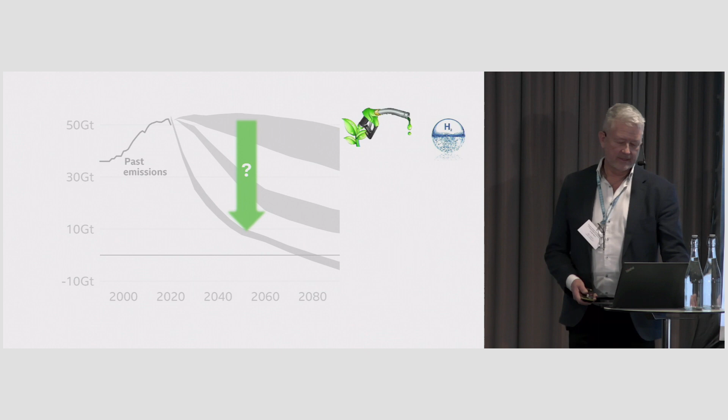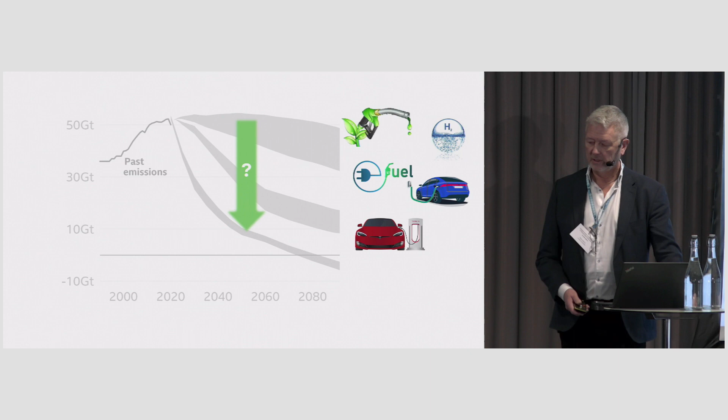So we know it is urgent, but do we really know how to accomplish this fantastic drop in CO2 emissions? We have and we debate several alternatives. We have biofuel. We have electrofuels. Hydrogen. We have various forms of electrification: plug-in charging at home, fast charging along the road. We even have electric road technology today.

And we know that all these technologies work. We can do what we want to do with a single vehicle with any of these. Even the newcomer on the block, electric roads, has turned out mature enough to be put on public roads. But we still don't know exactly how to upscale this. Upscaling is the challenge of the moment. We need to reach 100% electromobility by around the middle of this century, and there are many questions to answer.

Do we have enough biofuels? Can we produce and distribute enough green hydrogen? Professor Sebon has already said no. Can we produce enough batteries? How many fast charging stations do we need? How much electric road systems would we possibly need? The energy transition that we need to implement takes decades, and we only have one chance, in my opinion. It is very important that we move in the right direction now.

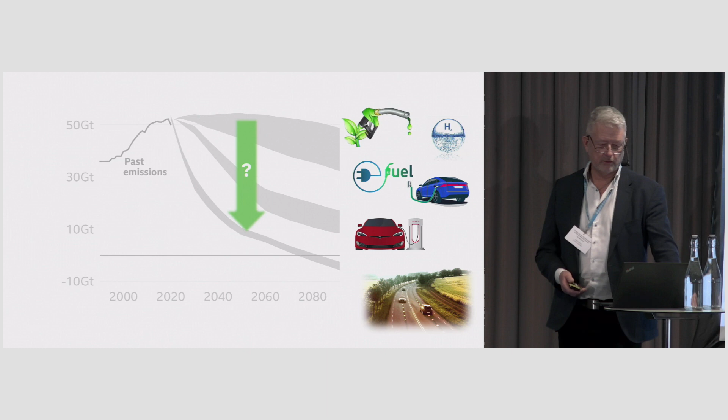A country that is way ahead of us is Norway. They have already reached almost a quarter of a full electric vehicle fleet and sell over 80% full electric vehicles today. Their experience of upscaling gives us a hint of what we are up against. That's why Lars is here, as a voice of the Norwegian EV upscaling experience.

I like to throw numbers at people, and I will take one example that I extrapolate from Norway that I think is really interesting. For the last 5-6 years, since about 2018, Norway has had a density of fast charging stations of about 1 fast charger per 100 full electric vehicles. This is an empirically found level that provides a reasonable waiting time at fast charging stations at times of high traffic. I don't think Norway has decided to build way more fast chargers than needed; that level is in balance with practical life with electric vehicles.

If we keep that density, assume the rest of Europe is like Norway, and apply that principle to the TEN-T comprehensive network, which is 130,000 kilometers across Europe, with a fast charging station every 60 kilometers as AFIR recommends, then the Norwegian density level corresponds to, hold on now, 1,100 fast chargers every 60 kilometers. You heard me right. That's about 10 football fields every 60 kilometers.

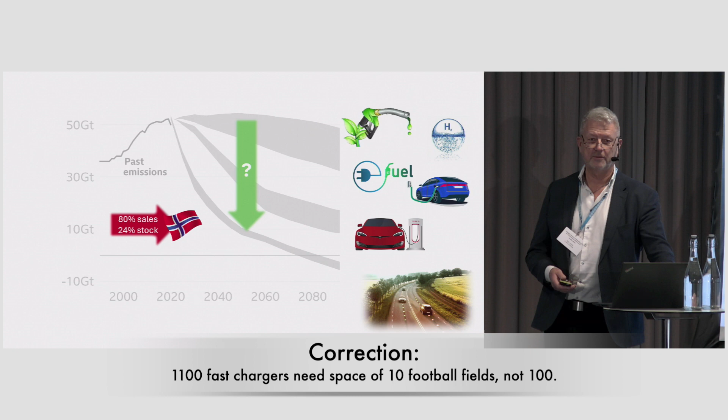Can we do it? I don't say that everybody is like Norwegians, but I think we in the rest of Europe are not too different from Norwegians. We have to take this seriously. It is not obvious that upscaling electromobility this way is easy.

It looks so now, but I have doubts, and that's why I think it's so interesting to listen to you, Lars, and to hear the Norwegian experience. And here we have the motivation for this conference: to answer the question of realism with upscaling of the different technologies, not only electrification with batteries and roads and fast chargers, but all the other alternatives as well.

What are the main obstacles on the way to a significant reduction of CO2 emissions from road transport? Which technology or combination of technologies gives the highest likelihood of success in abating CO2 emission from road transport in a 10 to 25 year perspective, which is what we are talking about? To answer those questions is one of the reasons for having this conference. Another reason is to present the results that have come from evaluating one of these technologies, the on-road technology that we will look at more today.

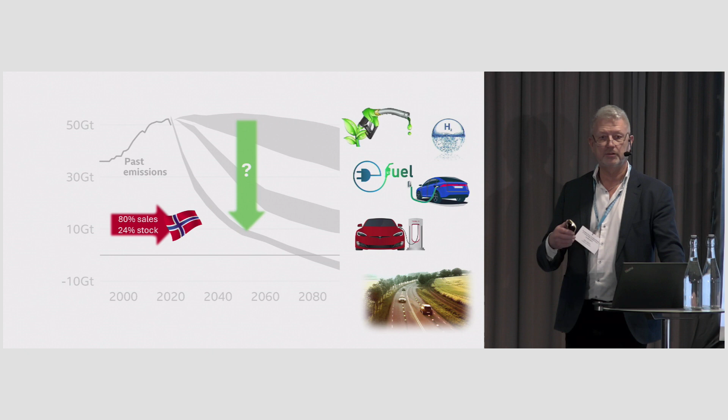To answer these scientific questions, this challenge, the project Evolution Road has engaged external expertise, external to the project, to approach the challenge. And now I should show that slide. To approach the challenge in a broad and objective way. When we talked about having this conference, we said that it should be a result conference. We should present what we have accomplished, how good the electric road works. And we said no, that will only be a conference where we tell how good we are, but not how we fit in. So we need someone to objectively look at how this technology, which works, fits into the bigger picture.

But we want these two days, today and tomorrow, to be used to challenge the conclusions that we have reached so far. We want discussions, opinions, we want feedback. We will work that into the final version of the report to make it better before publishing it to a much wider audience. And that with your help. So with these words, I hand over to Jakob from RISE to present a summary of the work so far. Thank you.

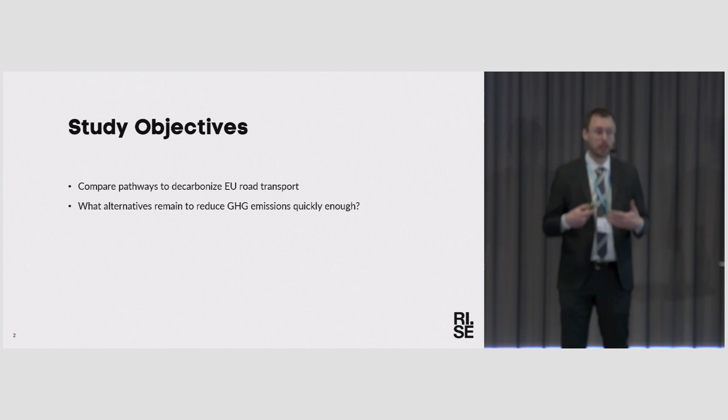Indeed, so this is at least an attempt to do an independent review of different pathways to decarbonize EU road transport, as much as possible by 2035. RISE is not tied to this Evolution Road project, although it's a very interesting project. Evolution Road has provided a lot of information to this analysis, but so have a lot of other stakeholders, including, for instance, the hydrogen section of Daimler Trucks. So the goals have been to compare different pathways to decarbonize transport in comparable metrics, and to really look at what alternatives we still have to decarbonize EU road transport in a quick way.

To set a little background, what are we trying to achieve? Well, the scientific advice for the EU is to reduce greenhouse gas emissions from all of the EU economy by 77 to 87% by 2035 versus the 1990 reference level. It's quite significant. For road traffic, we are today about 20% above 1990. We're not doing very well with the 35 years we've had to improve things so far. We have another 10 years to drop. It's going to be tougher now than it was.

And the current ambition level that the EU has set through policy is to eliminate tailpipe emissions from light vehicles by 2035 in the new sales. There are no targets for the rolling stock. And for the same year, reduce the emissions from new trucks by 65%.

Again, no targets for the rolling stock, and this is versus the 2019 level, not the lower 1990 level. The technologies we've looked at are the ones that both Mats and David described. It's combustion engine vehicles operated with fuels, fossil fuels, biofuels or electrofuels. It's battery electric vehicles, both new vehicles and those converted from combustion engine vehicles, where you replace the powertrain with an electric one. And you power those either with what we call slow charging, this is more well defined in the report, fast charging or electric road systems.

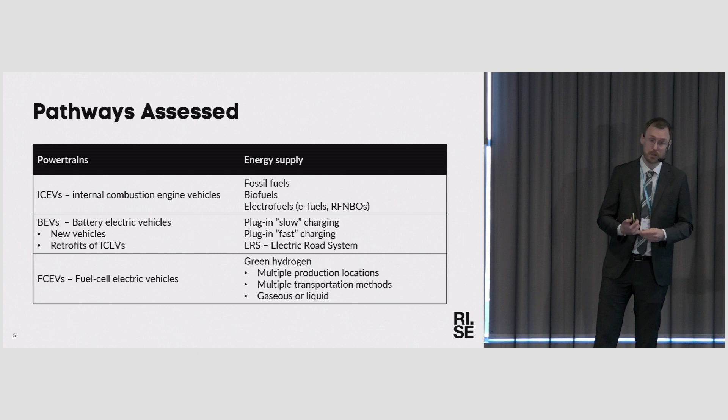We have fuel cell vehicles powered with only green hydrogen, which means that it's basically sustainable, unlike the hydrogen that we produce today, that is all from fossil fuels. And this is produced in multiple different locations. We've looked at different prices that result from this, as well as different ways of transporting and delivering it to the truck, either in gaseous or liquid form. And they have different properties associated with these.

And we try to summarize this in a levelized cost per kilometer, levelized emissions per kilometer, and estimate the kind of maximum scalability. How much of the EU road transport by kilometers could run on this fuel technology by 2035, if all goes well and if things don't go so well.

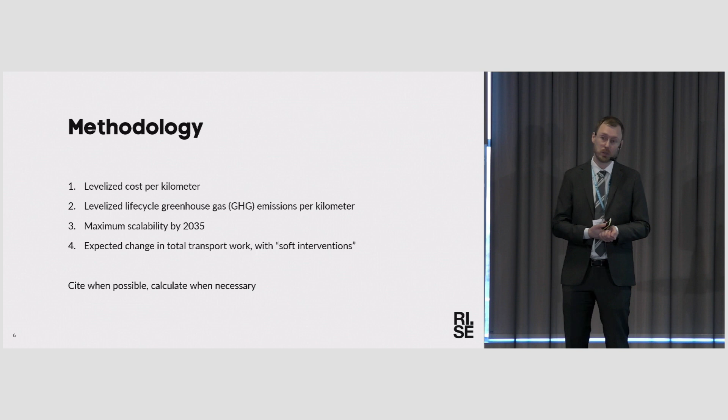And we also, this is not the focus of the study, but we have looked at complementary strategies to reduce transport demand, which is really complementary. It's not something that you can do instead of. Even if you reduce transport demand by half, you still need to decarbonize road transport as quickly as you do otherwise. No matter how quickly we decarbonize road transport, we likely still need to work with demand reduction. So they are complementary. We try to cite sources whenever we find them, but we do need to do a lot of unit conversions, and for some things there aren't really good sources, so then we have to do some calculations.

For road transport demand reduction, the short version is that we don't really see mature, scalable template solutions that you can just roll out. There are lots of examples of initiatives that have reduced demand in some little focus area, a neighborhood or so on, but to say that you can achieve this on an EU level by 2035, I strongly doubt it.

When we talk about moving cargo to rail and waterways, well, the vast majority of both cargo and people transport goes on roads today. So doubling the capacity of rail and waterways is not going to have a significant impact on the road transport. So unfortunately, that is also not going to result in a significant emissions reduction in this time frame. And in fact, from what we understand, the most likely impact this will have is that it will reduce the increase rather than actually reduce the amount of transport.

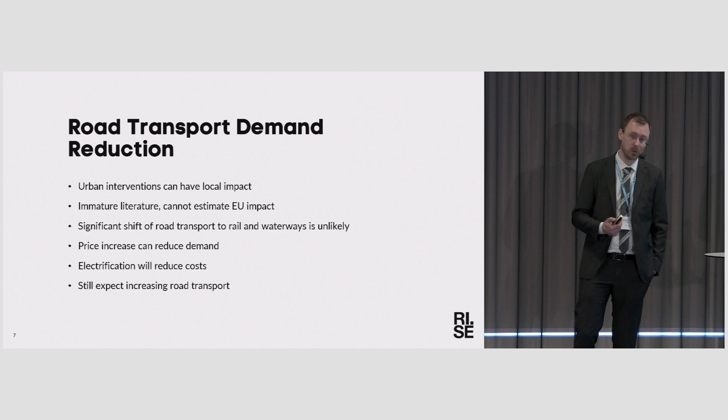Biofuels, they are the first technology that we look at. They are in use today. They contribute about 6% of EU road transport by final energy. If we assume a reasonable cost of carbon and account for that as part of the system cost of using biofuels and fossil fuels, then they have roughly the same cost as fossil fuels by 2035.

But it's very difficult to increase supply of biofuels because very quickly you start competing with food production. This means that you need new technology, you need new carbon sources, things like wood residues, and many of these come with increases in cost, and that is not very likely. If you need to triple the cost of the product, you're less likely to sell it, right? So we don't think biofuels can be scaled up much further. A little further maybe, but not much further.

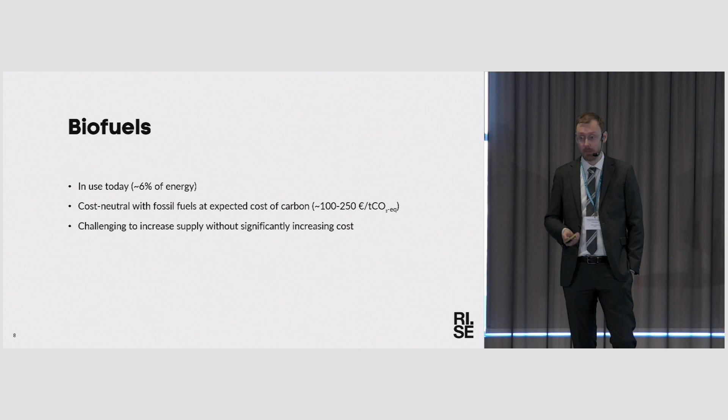Hydrogen and e-fuels. The short version is exactly what David said. It's way too expensive. The green hydrogen is not available today. You can barely buy it. Supply is much less than the proposed uses by 2035. And by that I mean the different sectors in which we want to use green hydrogen,

the sum of the demand from those sectors. If we rank these, this is based on Michael Liebreich's hydrogen ladder, if we estimate the demand from the sectors that have higher merit than road transport, things like fertilizer production, steel production, where there are fewer alternatives, then we don't have any hydrogen for road transport because demand is still greater than supply. Whether there's a demand, that depends on the cost, of course, but at least we should use it where it actually results in great decarbonization.

This also means that if we use green hydrogen in road transport, we are not having any carbon reduction from a system level. We're just forcing somebody else to use fossil fuels somewhere else. It's expensive through all pathways that we look at. There is no pathway that leads to cheap hydrogen. There are studies that say we can have cheap hydrogen, but they, as far as we can understand, neglect to count several costs included in this chain.

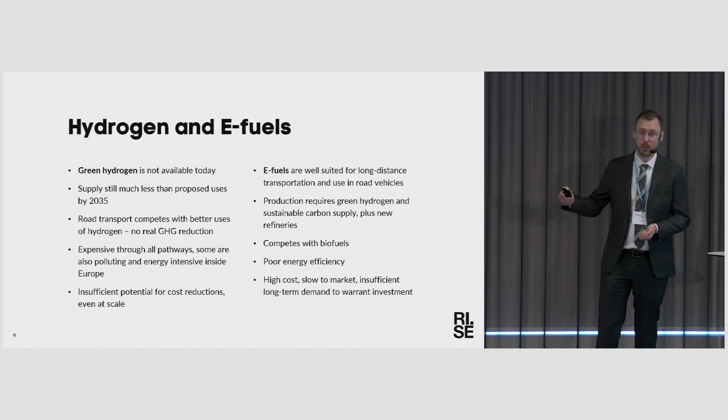Either you do that with biological sources, then you compete with biofuels and reduce the supply of those, or you can do carbon capture in some way, and that technology is not available in a way that we can scale it up. Certainly not in a cost-efficient manner. Do you want to invest in this? Well, probably not, given that we also try to phase this out. So by the time you might have a mature technology and you have your plant up and running, then it's time to ramp down.

Battery electric is the only pathway that we see is really scalable, that you can affect a large share of the transport system in this time frame. Compared to the other solutions, it offers the lowest cost. The electricity supply is rapidly decarbonizing, which means that if you replace the vehicles with electric ones, they will continue emitting less and less and less the longer we use them.

The batteries, however, do contribute significant emissions during production, and this is primarily an issue for light vehicles, because all vehicles need batteries. We have many, many more light vehicles than heavy vehicles, and therefore we end up with about 90%-ish of all the batteries sitting in light vehicles. So it's those that contribute to the embodied emissions.

And we also have a problem with uptake in the near term. So we sell new vehicles, and that's how we imagine battery electric vehicles are going to enter the stock. But we primarily sell new vehicles in North and West Europe. South and East Europe doesn't really buy that many brand new vehicles. They buy primarily used vehicles from North and West Europe. So they are going to be maybe 10 years behind if we go that pathway of introducing new vehicles.

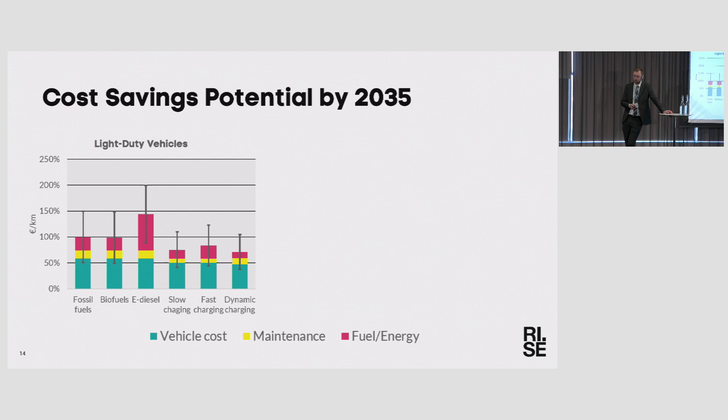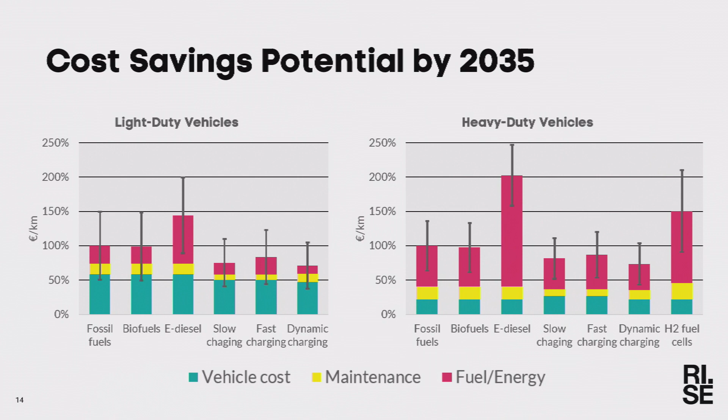For heavy vehicles, it's mostly operating costs. This does not include the cost of trailers, which you might have some rules of thumb of how much is capital expense and how much is operating expense in heavy trucking, and that might distort things a bit if you include the trailers.

We see that battery electric vehicles, because they need large batteries, if you don't have dynamic charging, they will cost a little more than the combustion engine vehicles. But it's a pretty small extra expense when you consider the benefit of reducing operating costs in terms of energy and maintenance. Dynamic charging would probably reduce this a bit more. If I remember, I will mention a limitation of our way of calculating dynamic charging cost that possibly underestimates the cost per user a bit.

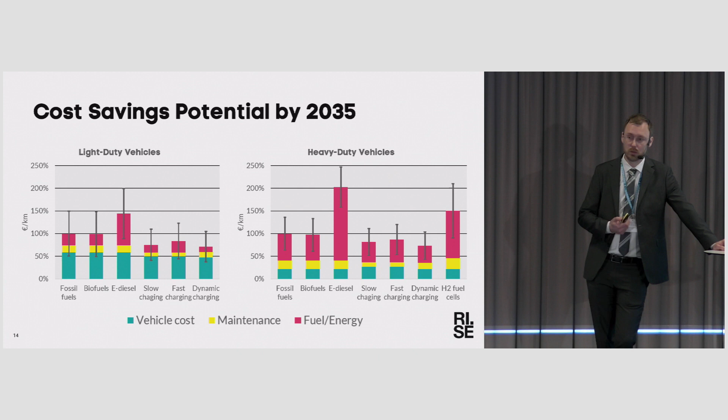Hydrogen, even in the most favorable scenarios, and this is pretty much when you assume everything to be on the side of hydrogen, then we can get costs that are probably comparable with the average expected cost for fossil fuels and biofuels. Biofuels is 100% biofuels here. But going below that and going down to the level of battery electric, we really do not see this happening in terms of cost. Much more likely that you end up, as David said, 2-3 times higher in terms of cost. Electrofuels, same thing here. There is no supply, there is no cost competitiveness at all.

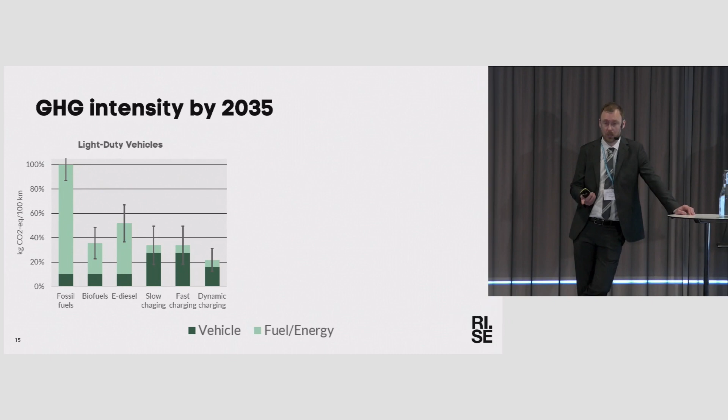Greenhouse gas intensity. We can see that all of the technologies significantly reduce emissions on the light vehicle side. We can also see that for electric vehicles, the production of the light vehicle is really an issue. If we transition all of the vehicles on the roads to electric, we have still only achieved somewhere between a 50 and an 80% emissions reduction. And we need to go down below that. So how do we go down below that? Well, cleaning up the electricity grid is certainly helping. Now this is 2035 grid electricity, which means that it's significantly cleaner than EU electricity today.

But we do need to reduce the battery emissions. And I'm not an expert in how to manufacture batteries, but from my understanding most of these emissions come also from electricity input. Is that correct? Yes. Which means that if you clean up the grid, you're going to reduce these emissions as well. But if you import batteries from China, then they will also clean up their grid, but not as quickly as we will in Europe. So you will continue having significant emissions. If you reduce the battery capacity per vehicle, that significantly reduces the emission per vehicle also.

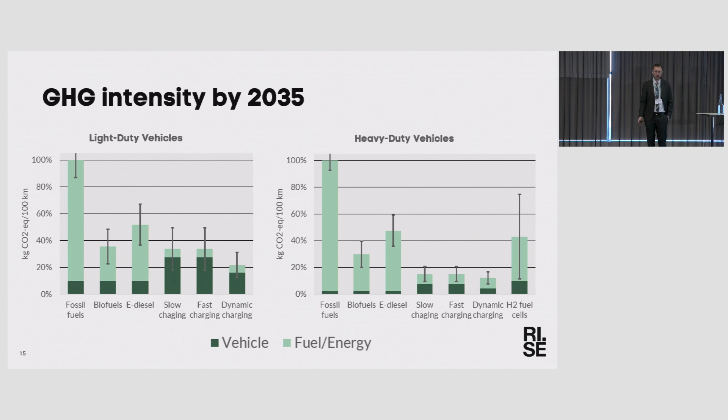On the heavy side, we have instead operations driving emissions. So in this case, we actually can reach significantly lower emissions by electrifying than for the light vehicles. So in some sense, it's the light vehicles that are the difficult to decarbonize sector, not the heavy vehicles. It's just that we're not doing the heavy vehicles yet. Hydrogen, we are going to have to pretty much produce the hydrogen on site at the fuel station if we want low emissions, and we do that with pure sustainable electricity. As long as there are truck transports of hydrogen involved, or as long as we use liquid hydrogen, there is very likely to be so much leakage, and hydrogen does contribute to global warming, that the emissions reductions disappear. We don't see any alternative to battery electric when it comes to decarbonization of heavy traffic.

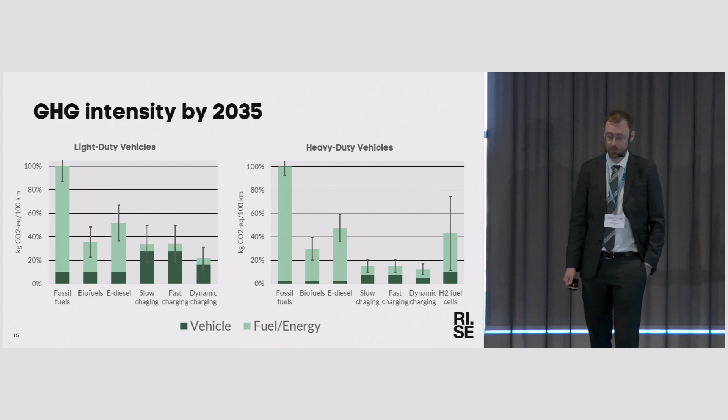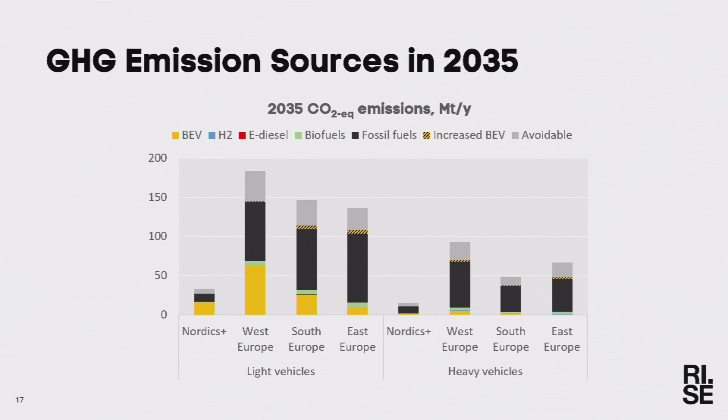So the gray part represents what we think is the maximum achievable additional reduction that we can achieve through very, very ambitious electrification targets. We don't think we can do more than that. If you want to reduce the rest, you have to reduce total transport by some way.

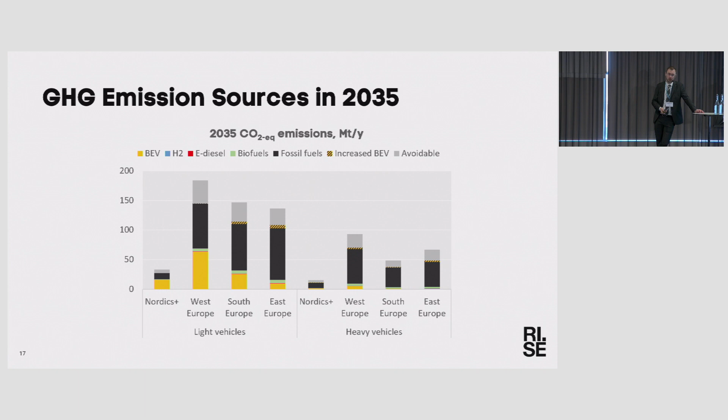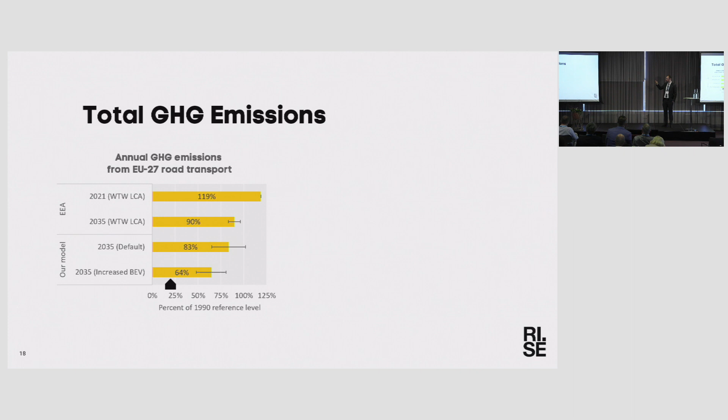Looking at annual emissions, we were hoping for 77 to 87% reduction by 2035 in annual emissions. That is the little black marker there. We see that in our best case scenario, we are somewhere here at 36% reduction on average. We have pessimistic and optimistic scenarios, indicated by the little error bar here. But really going below that, we don't see this happening in this time frame.

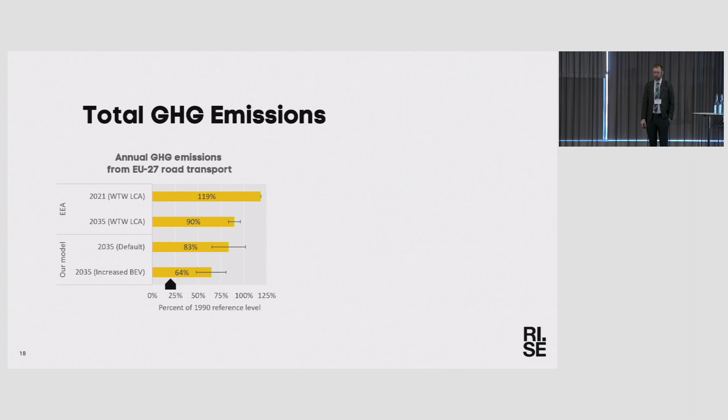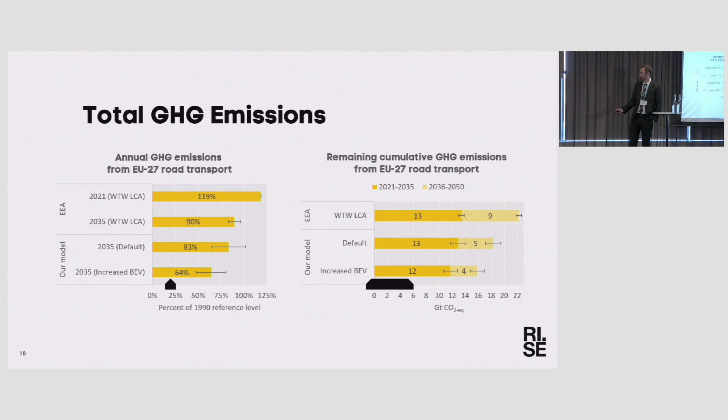The key thing to achieve at least is that in the current European Environment Agency forecasts, we do not reach zero tailpipe emissions by 2050. We have done something like, I think, 60-70% reduction by then, and that is tailpipe emissions, which means that we're still running vehicles on combustion engine fuels by then.

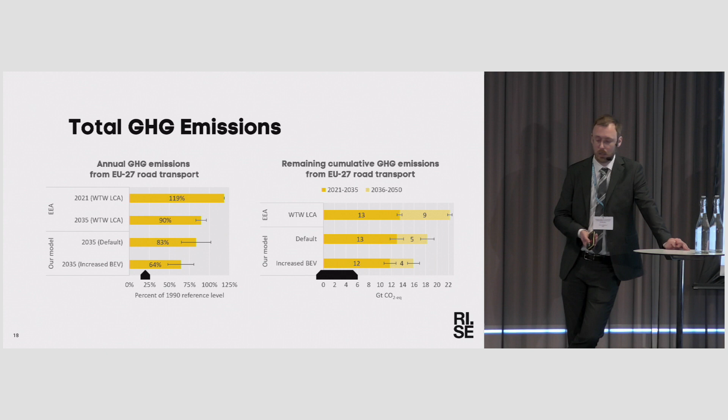In our scenarios, at least, we reach 100% electric vehicles by 2050. Then we have no tailpipe emissions, and we're working with reducing these battery impacts. And that is maybe doable. To summarize, we do not expect any further contributions compared to today's level from biofuels, electrofuels, or hydrogen.

We expect further greenhouse gas reductions from direct electrification, and we expect light-duty vehicle batteries to be the factor that counteracts this. Electric road systems would likely increase electrification and further reduce emissions from battery electric vehicles, especially on the light-duty side where we reduce battery emissions, and reduce cost primarily on the heavy-duty vehicle side. We do need conversions, and we see some indications that for conversions to take off, we need electric roads.

We need to shrink the batteries in vehicles. That is for three reasons. It is cost, it is weight, which I didn't talk about. So you cannot put in more. The new powertrain that you install in the vehicle cannot weigh much more than the one you take out, because the vehicle cannot be used. It's not approved for that. It's not built for that. And battery supply is the third one.

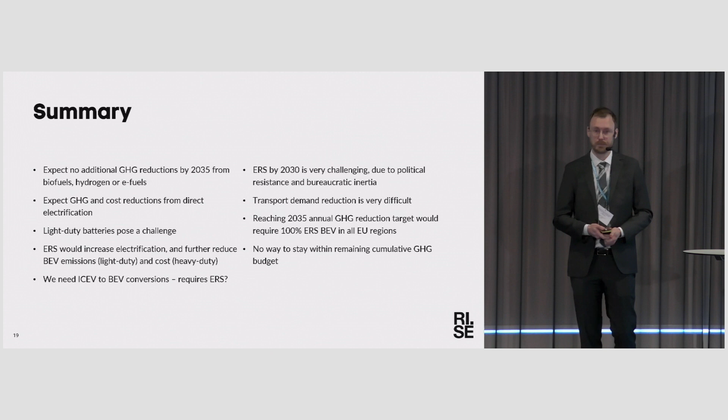All right, we have some questions from the audience. I will start with a quick hydrogen question. Does the cost for hydrogen consider the dynamic prices for electricity between day, night, summer, winter? The ability to store energy? We do not provide our own calculations for hydrogen, which means that you need to go to the sources that we have cited, but I believe that was taken into account. They certainly assume hydrogen is produced with significantly cheaper electricity somewhere else.

All right, thank you. I have a question from Andreas Pettersson. Yeah, I was thinking about whether it's taken into consideration for the light vehicles, the light duty and passenger cars, the big cost for ERS conversion. Will it be feasible to use it, or will the customer actually be willing to buy it, because it's a considerable cost when you have static chargers. And in the diagrams, it looked like the ERS vehicles should be cheaper on the vehicle cost than the static chargers. Is that taking into consideration the DC-DC converters and the pickup?